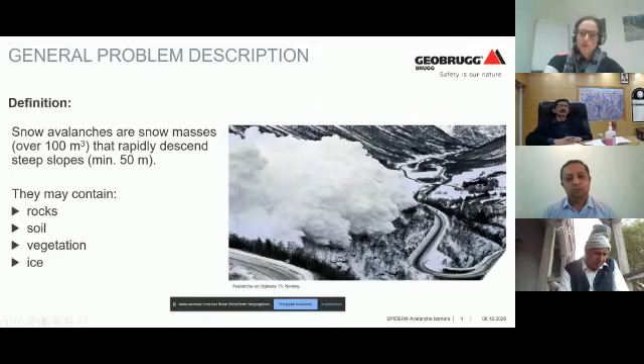So I'd like to start with some basics about avalanches. As we already heard, you need a lot of mass coming down a slope for an avalanche to occur, and that mass can contain rocks, soil, vegetation, or ice. For example, here is one at a highway infrastructure in Norway, and the goal is to prevent it or build structures so that this infrastructure is safe.

Important for construction, or depending on what kind of structure you'd like to build, is understanding the fracture zone, also called the starting zone. This is where the avalanche starts, and we usually have a slope angle of 30 to 50 degrees - at least 30 degrees is needed for it to start. Then we have the path, or transition zone, which can be a sheet or, as in that picture, a gully. Then we have the deposition or run-out zone where it halts, and this needs to be at a lesser slope angle, or as we already heard, it can have a run-up height if you meet a counter slope.

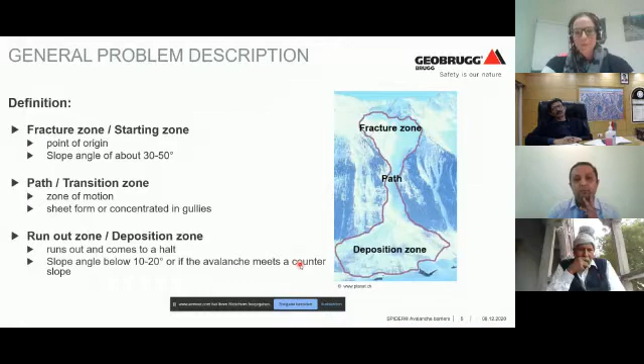So when talking about avalanches, we have to be aware of where they can occur. As I mentioned, we have the 30 to 50 degree range - we need at least 30 degrees for something to move or start. And why does an avalanche even move or start? What are the triggering effects?

First, we need precipitation - we have snow there - and most of the time wind is involved. We say that with precipitation and wind we are building the avalanche, because you get a lot of snow in one area. We need, within that snow cover, an unstable layer, which we call a weak layer. On top of that weak layer we have another layer of snow cover, and then the weak layer can release by itself due to the weight, or we have additional triggers - for example, skiers, or even explosives, animals, or just a rockfall hitting the snow cover.

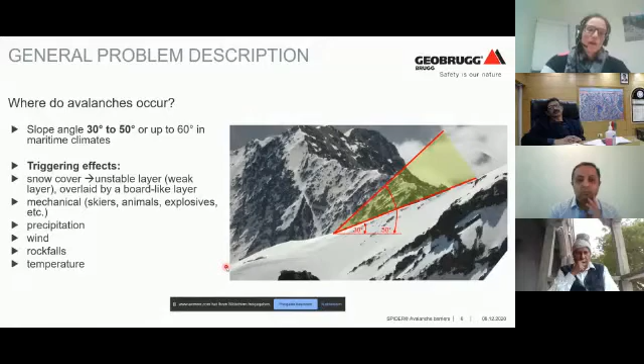Also a key factor for triggering effects is temperature. We see that in summer, or actually in springtime, when the snow gets really wet and heavy, avalanches trigger by themselves. Also important for understanding avalanches is classification - we have two types of release classifications.

We have the large slab, as you can see here - this is where we have that weak layer, and then it snowed again on top, so we have snow cover on top, and here skiers triggered the avalanche on that weak layer, causing the sheet to start moving. Or then we have loose snow, a punctual start of avalanches.

It's really important for simulating the flow, as we already heard, because it depends on the motion - what kind of avalanche we have. If we have one with a lot of air in it, that's a dry avalanche, or if we have, as in springtime when it's really warm, a dense, wet avalanche - the behavior of the motion is not the same.

There's also a huge difference depending on whether the avalanche starts on one of the weak layers, where we still have a lot of snow down to the ground, or if we have so-called ground avalanches that release right on the ground. At least in Switzerland, we see this a lot when it's warm and in spring - the entire snow cover starts to release, which is what we call wet avalanches.

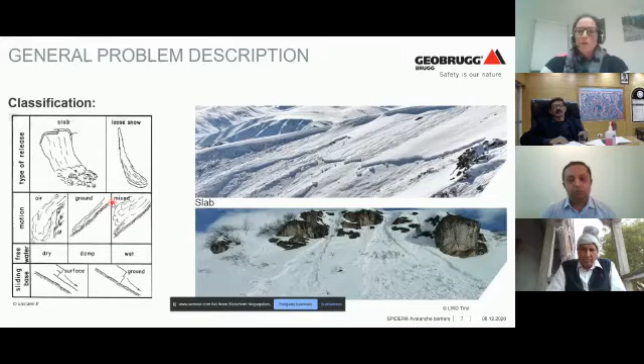And all of those are different kinds of avalanches, and for that we don't have one measure for mitigation. So it is important that we know what kind of process we are dealing with at a different site. Here I have a short overview of possibilities. So we have the starting and accumulation zone on top, then the tracking zone, transition zone, and down here the run out zone. In this case we have kind of everything here.

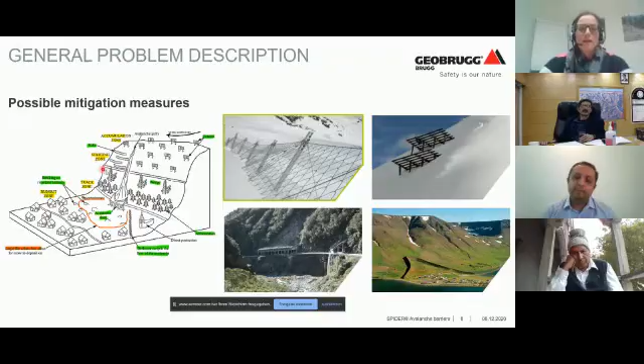Dr. Singh, can you continue with the questions please? Okay, a very general question, but I think it is very fruitful to understand these basic things related to the avalanche. So I am putting to all the panelists, not specific to anyone, what are the various factors that can trigger an avalanche?

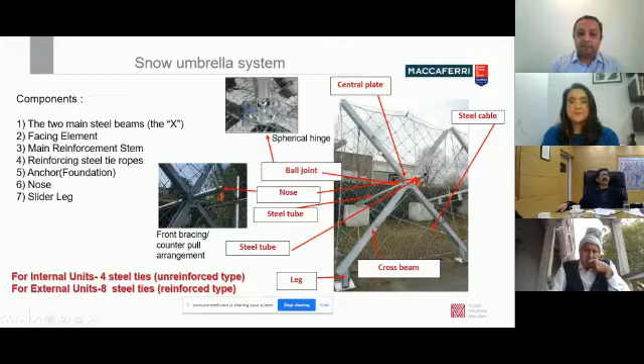So these are the units that we are using at all the 5 locations.

What will be the tensile strength of your wire? The wire ropes are basically graded at 1770 Newton per mm square. So these are of course the high strength wire ropes that are being used. Even the steel is high strength steel, which is heavily galvanized, and also suitable for low temperature conditions. Otherwise, if it's regular steel, it tends to become brittle with low temperatures.

Okay, can you have some creep type of study related to these wires? Some creep study has been conducted because there is continuous loading going on, if it is a continuous flow.

So these systems are tested on field. They are installed on the field, and they need to sustain at least one season for it to pass the test. So that has been done for these systems, and they have technical approval done in Italy.

As far as the creep with respect to the loading which is going to come, that gets accounted in the design itself, not just of the materials but also in the pressure calculation. When we do the design, there are different snow factors we have to take into account, like the glide factor, the creep factor, the altitude factor. So the creep factor is also inbuilt when we calculate the snow pressure on the system.

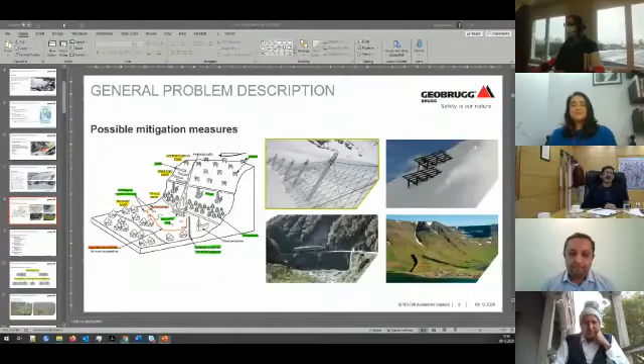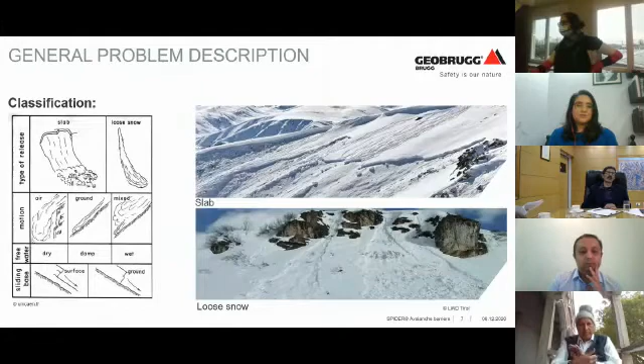Is there any possibility to go for the presentation once again, or still not? I think it's working now. Yes, we can. Welcome, thank you. Please continue. So you already see my screen? Yes, it is showing. Perfect. Was that the last slide you saw, or did you hear something? I think this is where we were.

Okay, perfect. So I went on with possible mitigation measures. As we said, we have the accumulation and starting zone on top, and there we can build in some possible mitigation measures, like snow nets or snow bridges. Then we have the tracks and the runout zone, and also if you have something on the track or transition zone, for example a road, we can have a tunnel, as you can also see on the right picture down here.

I don't have a pointer at the moment, but I think you can see it. Then we have some measures we can install in the runout zone, for example dams, or if you don't have that many houses there, you can resettle the houses already so that you have enough space and area for the runout zone. So there is a couple of possibilities for measures, and it depends on where your location is and what your process is and what you'd like to prevent.

So I summarized that here a bit. You have the technical measures, like all the measures in the starting zone, such as tunnels and deflection structures. You also have, for example if you have houses there, object protection measures for the houses. Then we have biological measures. At least here, where we have the forest boundary pretty high, we can use the forest to protect from the avalanche. As you can see here, we have a tunnel and a gallery, and still the trees. So we use them quite a lot, or at least as help if we have them. Maybe not so much for India.

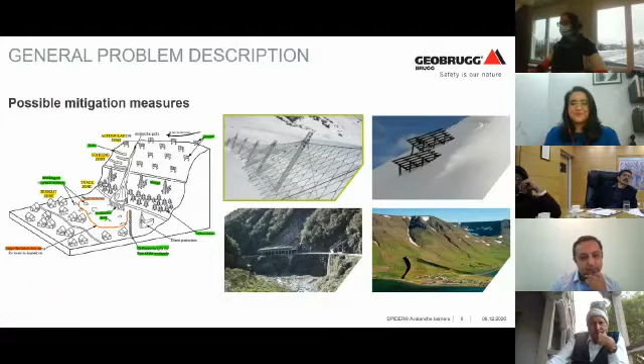Then we also have other systems, for example warning systems, or you can artificially trigger them. In that case we have mobile explosive stations, or you can try to explode them from the bottom valley or by helicopter. And of course, then you have to evacuate and close roads. What is not really working in Switzerland, for example, is spatial planning measures, where you really resettle people. So in our case that is not really working. We only have restrictions at the moment, where you're not allowed to build houses anymore where it is dangerous.

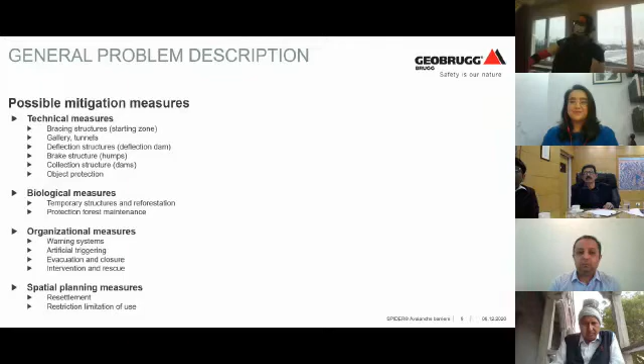So that is a rough overview of possibilities you can use in case of avalanche problems, just general ones if you want to go for technical measures. You need to take into account a lot of different things, and it's not only that you can install technical measures, it's kind of a combination, for example technical measures together with a warning system.

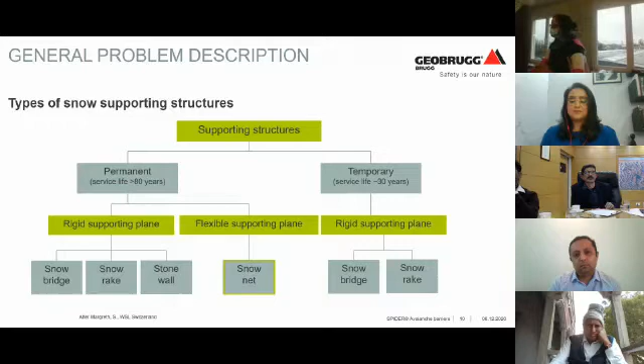And then, as I said, supporting structures in the starting zone. That is really important to know: they are only for the starting zone, so you install them there. We have the snow bridge, which is a rigid supporting structure, and we have these flexible supporting structures, the snow net.

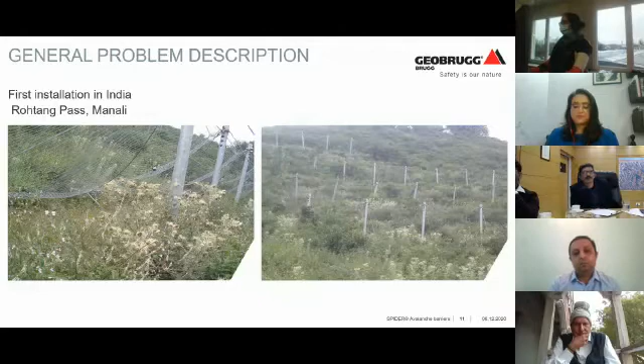For example, here we already had one in India, so that is a flexible one. It's a snow net, as you can see. Basically we have the net, we have posts, and we have ropes and anchors. This started a long time ago. They first installed them even with wood together in combination, and now it has developed up to what's called spider avalanche systems, the one you can see on the right-hand side.

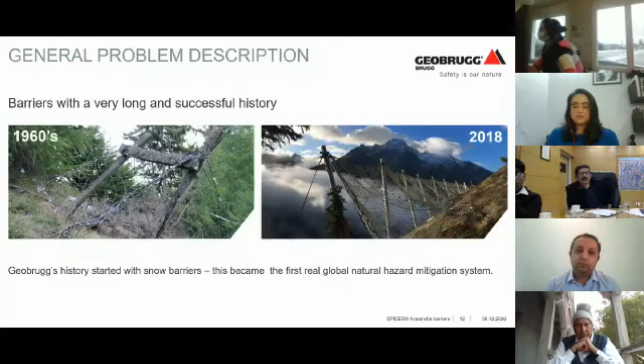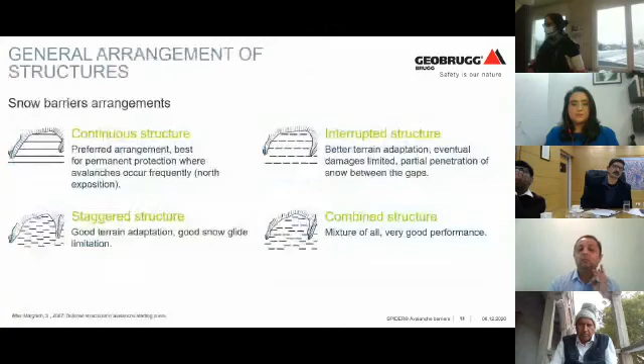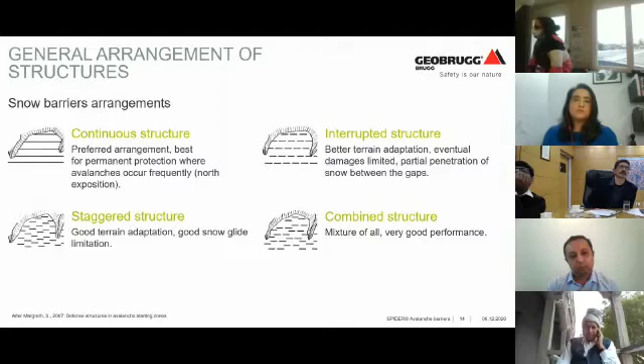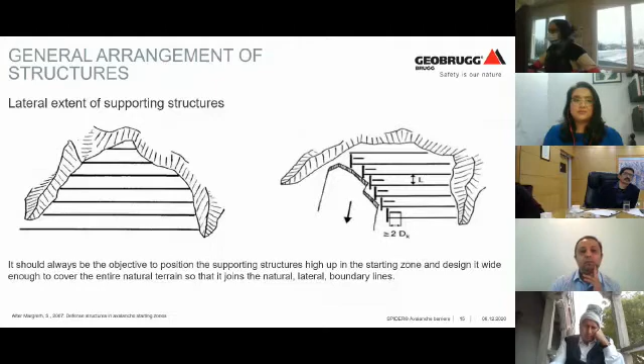Important is, if you like to install something like that, there is an arrangement of the barriers. You can have continuous structures, basically a closed line, or you can have interrupted structures, and it really depends on the terrain and what is occurring there. You can also have combined structures, as you can see here, with some long lines and then shorter ones in between. All of that defines how you should arrange them and what the gaps in between should be. If the gaps between the structures are too large, you should be aware that something could start again. All of this is defined in the guideline for defense structures in avalanche starting zones from Switzerland, and that is basically applied worldwide. All the constructions here in Switzerland are built according to that guideline.

Here is a top view of a good example. You can see that we have these different lines and gaps in between.

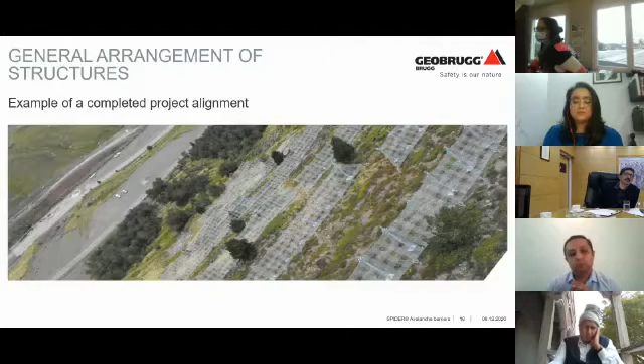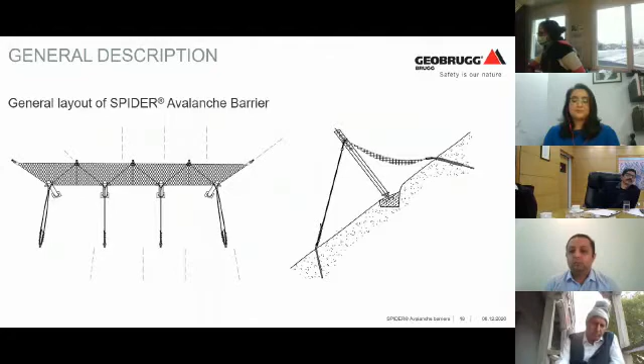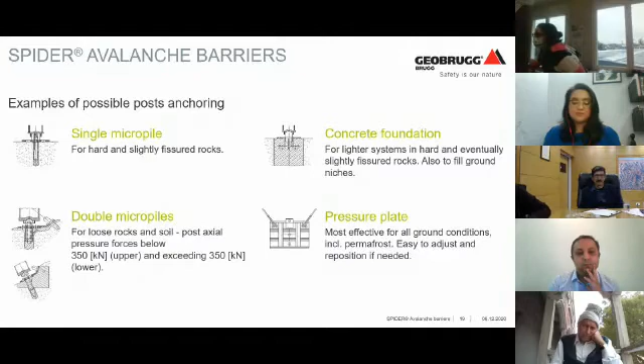So for how it looks with a net solution, as I mentioned, we have the post, a net, and ropes and anchors. Basically it's pretty simple and fast for installation. These are possibilities for anchoring the post, and there is something like the pressure post plate, which you can put on loose soil without having to directly anchor it with a micro pile like the ones on the left side. This pressure plate is also good because if you have creeping soil, it creeps with you, so it creeps with the system.

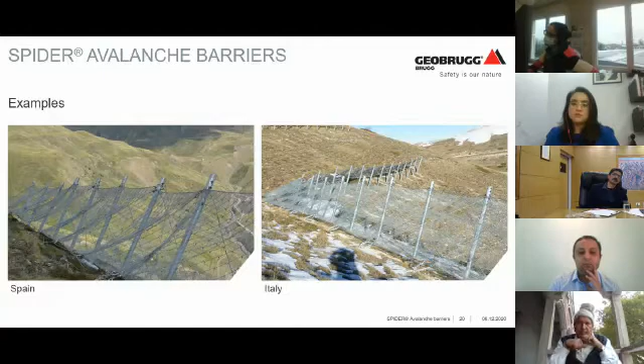And here again, some examples from Spain and Italy. So they get installed everywhere we have avalanches.

As I already mentioned, we have that Swiss guideline, so in Switzerland you can't install something that is not according to that guideline. The guideline basically tells you what kind of static proofs and calculation proofs you need for your system. And then, as already mentioned with the umbrella system, it also has to be installed in the field for one year or even more, and then they decide whether to approve the system for certification. Only when it's certified can you install it here.

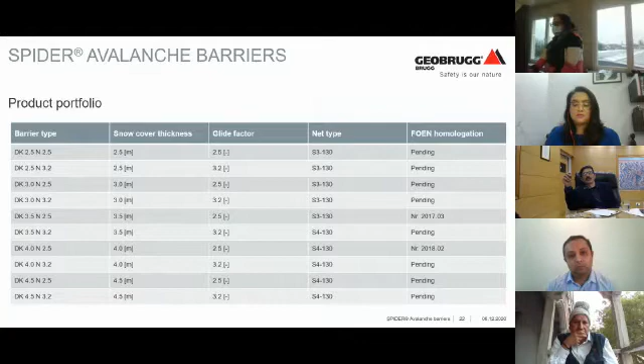So this is just a rough overview of what kind of systems we have, and the systems are mostly categorized by snow cover thickness. That is a key factor, and as already heard, the gliding factor too.

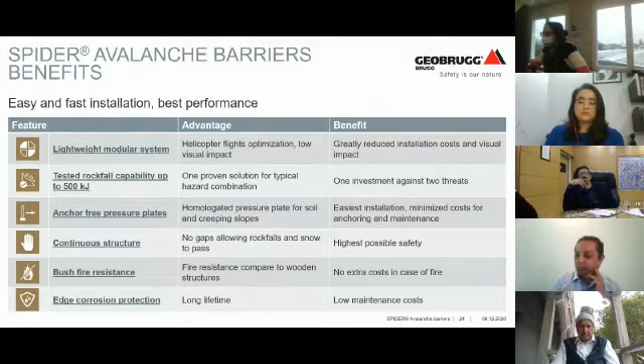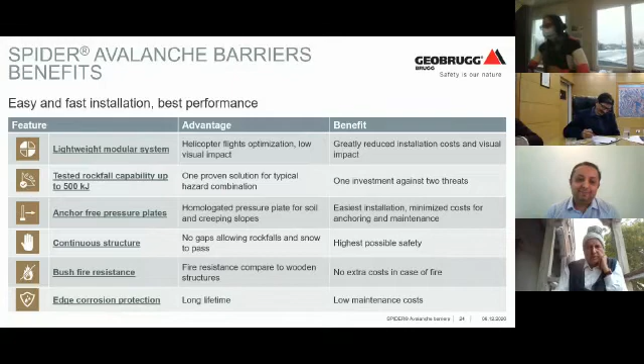Just briefly, what are the benefits of such an installation? It's pretty light, you can fly it up by helicopter, and in that case it's also tested against rockfall. That is a big difference compared to the rigid system: if you have a rockfall, rigid systems don't deal well with it because they are so fixed, whereas a net or flexible system can handle rockfalls better. Then, as I said, we have the pressure plates that help a lot with installation. You don't have bushfires I guess, but it's also good with fires, and of course there's corrosion protection.

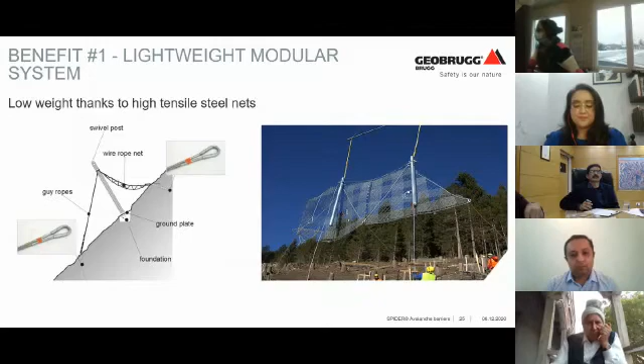This is a picture showing how it looks. You can build everything on a smooth place together, and then hang it up on the helicopter and fly it onto the site. You can also do a combination, so we have the rigid ones and the flexible ones in between, just depending on the situation.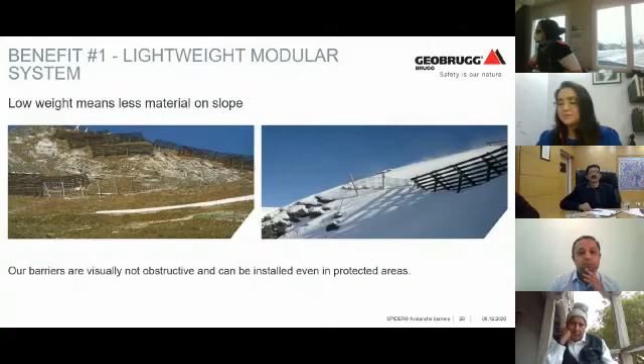As I mentioned, rockfall is always a problem. So if you have more than one row, it's also possible that one row gets hit by rock so much that it's not useful anymore, but it gets stopped in the second or third row.

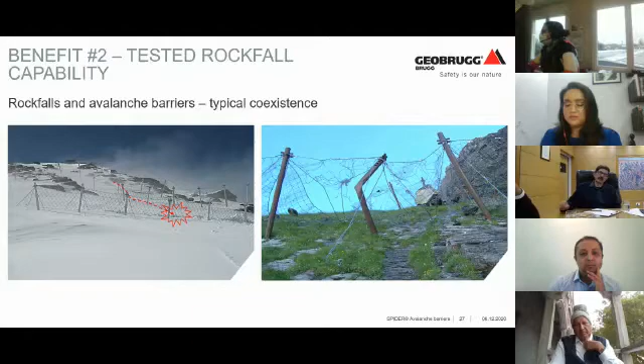Regarding rockfall, it's always a question of what is the major hazard you want to prevent. In case of avalanches, that's obviously the major hazard, and if there could be a bit of rockfall too, you could install one, but it's not the major hazard. If you want to withstand rockfall, you should better go for a rockfall barrier.

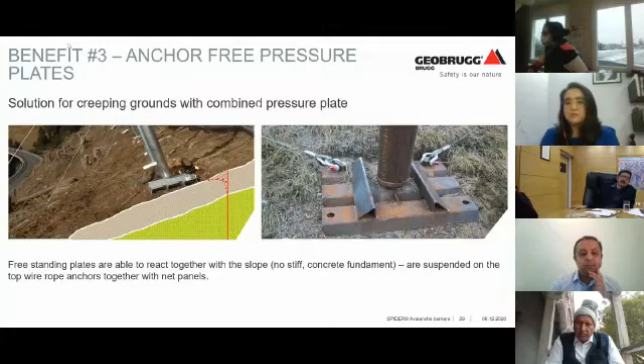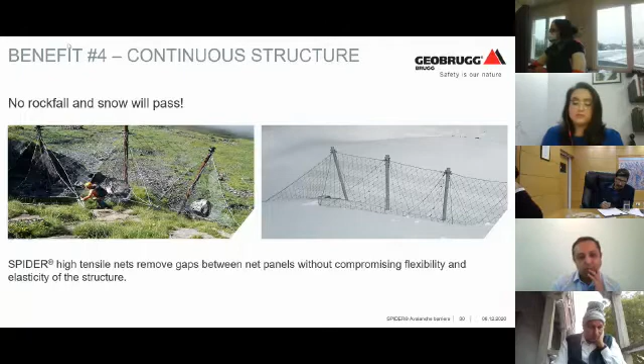There is not only the static component, there's also the dynamic part. If you just have static loading because of snowfall, there's also that creeping factor, the creeping motion of wet snow in springtime. A barrier is designed either for static or dynamic loading, so getting the right combination is pretty difficult, but we've managed it well over these last 40 years.

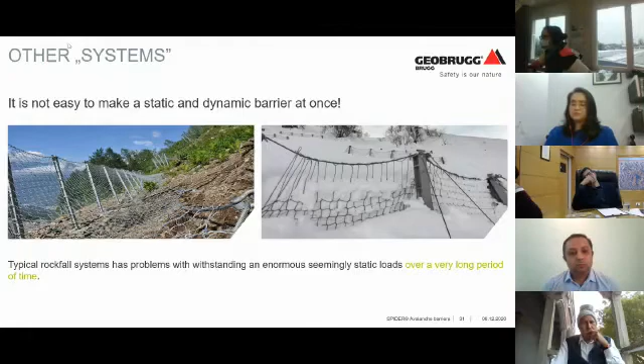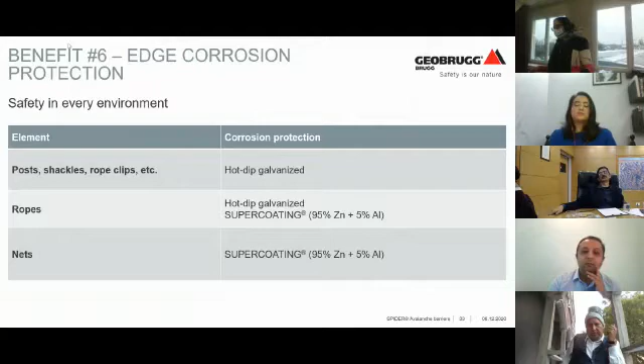Also, fire shouldn't be a problem since it's steel. Regarding corrosion, that topic is not as important as for other products, because you're high up, so your corrosion level isn't so high. Even here in Switzerland, there's no specific corrosion protection needed for avalanche structures. The guideline tells us you should have an allowance of a larger diameter so it can get corroded a bit, but it's not like for other products - as long as you're not close to the sea, like in Norway, where you're really close to the sea with avalanches. There you should keep an eye on corrosion.

I'll skip a bit on the corrosion part, and we'll show you some examples. They've been there since the 1980s, so that's 40 years now, and they're still looking quite well, almost as new.

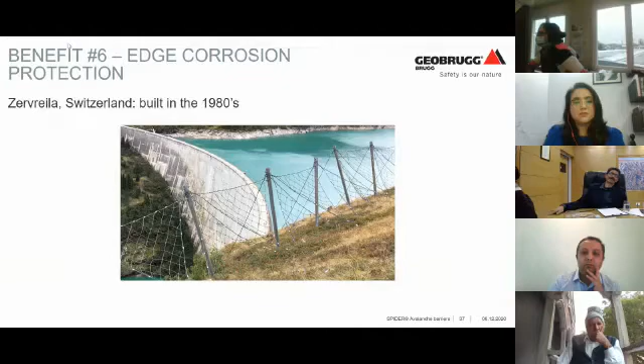So just to give you an impression of how they look - they have different heights, barrier types, so that's 3 meters here. And then we have different gliding factors. Basically the guideline tells us we can go for 2.5 or 3.2, depending on how your terrain looks. They're certified for those standard parameters the guideline gives us.

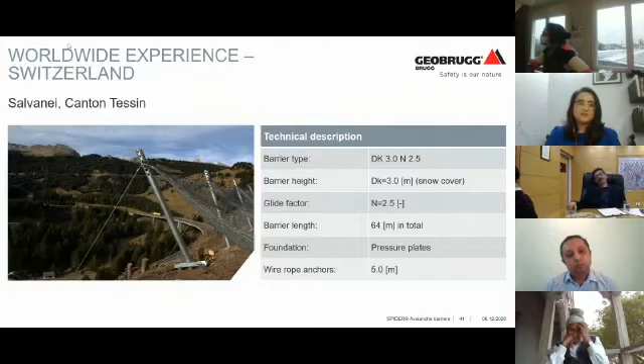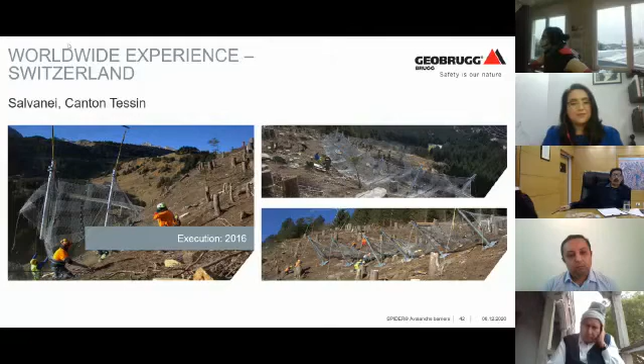Here we have a total line of 64 meters, and here you can see how the installation is going, from the top view.

Another one - this one is already quite long. Actually it's not just one, it's the total one - every single field together sums up to 455 meters.

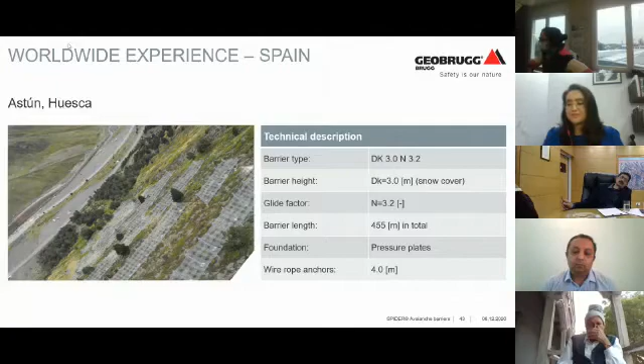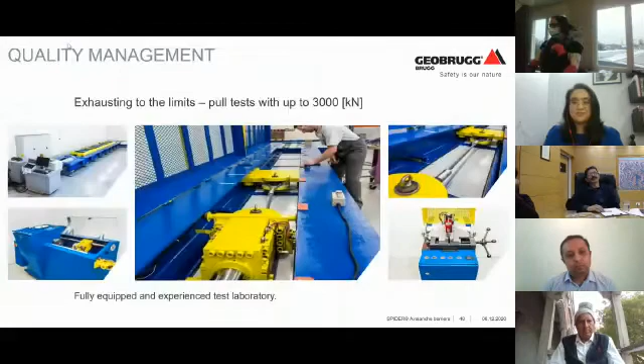That's just the overall scope. You get everything here, and I guess we'll talk a bit more about the avalanche systems during the question and answer. Perfect, I think we can continue with the questions now, and take this discussion forward.

Professor Singh, would you like to take over? Yes. Two quick questions, ma'am, and we'd like short answers because we have the next session also.

So, what are the risk assessment techniques to propose an avalanche protection system on a particular site? Okay, what we are doing is called integral risk management. Basically it consists of risk analysis, risk assessment, and then action planning. In the risk analysis, you ask yourself, at the site, what could happen - for example, is there avalanche risk, is there rockfall, or whatever.

At the risk assessment stage, it's the question of what is likely to happen, and there it's already about what is underneath - is it houses, is it people's life, is it traffic? Then you have the third stage where you do your action planning - what must be done for that case, or what your extreme scenarios are, what you'd like to protect.

Let me share a couple of slides to show a few things. I hope you are able to see my screen. Yes, please. Okay, thank you. So as I was mentioning, first and foremost is the slope inclination that we have to see, and accordingly place the supporting system in that zone. The next thing we have to decide is what should be the first starting line, the topmost line in this section that we have to fix.

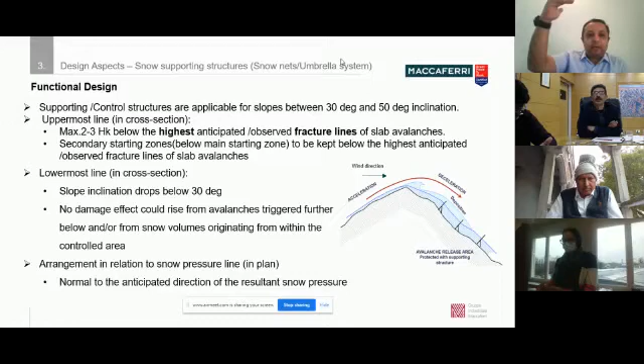So typically, this is fixed at a distance of around 2 to 3 times the height of snow deposition. So 2 to 3 times the height of deposition of snow from the observed or anticipated fracture line of an avalanche. That is the first line. That's how we have to fix it.

If there are certain zones along the slope, if the slope is very long, there are also secondary starting zones. We have to take that into consideration and fix the topmost line for that zone accordingly. With respect to the lowermost lines, the lowermost line should be fixed in such a way that the slope inclination below it drops to less than 30 degrees, so that the avalanche doesn't happen, and there should not be any damage which can arise from an avalanche triggered in that zone. That's how we fix the bottommost or lowermost line.

So once we have the uppermost and lowermost line, we now have to also fix the intermediate lines and what should be the spacing and things like that.

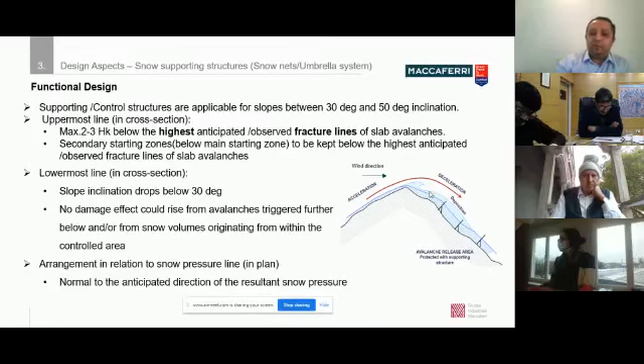With respect to the alignment in relation to the snow pressure line, the alignment of these structures along the length should be normal to the anticipated direction of the snow pressure. We have to follow the contours in the plan drawing, so that the anticipated pressure direction remains normal. As far as the lateral extent is concerned, how long should these lines be?

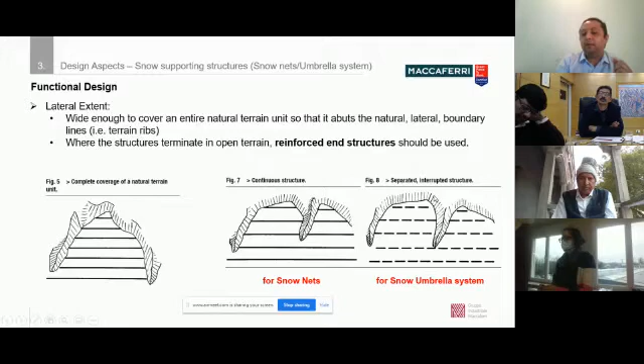The lateral extent should be wide enough to cover the entire natural terrain, so that ideally, if there are certain terrain ribs or boundaries existing, it should be extended up to that. In case they need to be terminated in open terrain, naturally the end part needs to be reinforced. This kind of arrangement is the same whether it is a snow net or an umbrella system. It's just that with the umbrella system there will be 0.5 meter gaps between the individual units, so it's called the separated or interrupted structure.

When we come to the spacing between the rows, the Swiss guideline also incorporates the procedure to fix it, and they have given some equations, and they've also given tables for the most likely conditions that we encounter during the design. So the design of the spacing is dependent on the inclination of the slope first and foremost, and the height of the snow deposition. It is also dependent on...

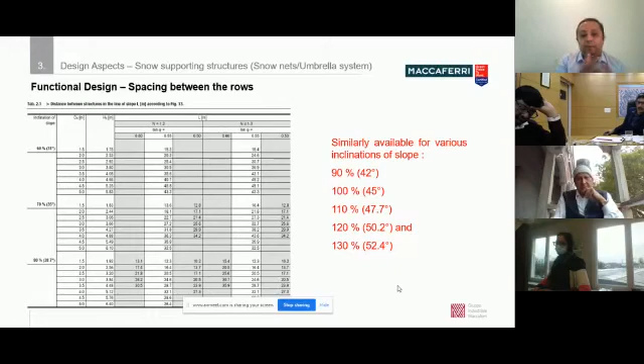the glide factor. This n value, the glide factor, is dependent again on the roughness of the terrain and the configuration of the slope. Apart from that, there is also a dependency on the roughness between the snow and the terrain. There are different ranges given, and we have tables available for different slope inclinations. We can use these tables, or use the equation from which these tables are formulated, and do some interpolation if required, if there is a variation. So this is how we do the functional design.

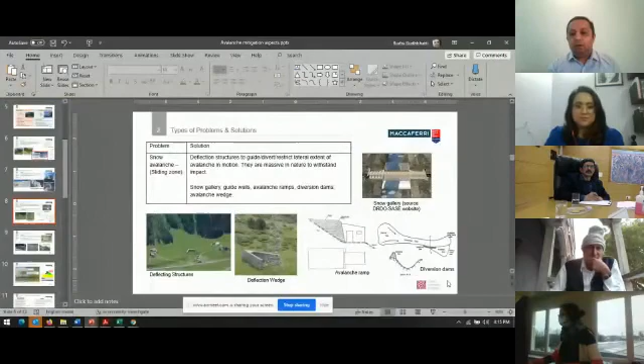I'll quickly show it again so I can be brief in explaining, using the already available slide. So when it comes to the sliding zone, which is the intermediate zone, the deflection structures work there, and the purpose of such deflection structures is basically to guide, divert, or restrict the lateral extent of the avalanche, which is already in motion, because in the formation zone the avalanche has already started. So in the intermediate or sliding zone, everything is moving, so these structures need to be very massive in nature to withstand such a moving impact.

Some of the structures, like the snow gallery which Dr. Kumar was mentioning, are a good solution that can be adopted in the sliding zone. Other options are guide walls or avalanche ramps, which basically allow the full avalanche to move out and away from the infrastructure being protected, so it acts kind of like a roof. There are also diversion dams to restrict the lateral extent. If there are transmission towers, we can have a masonry wall forming a wedge so that the avalanche can be deflected.

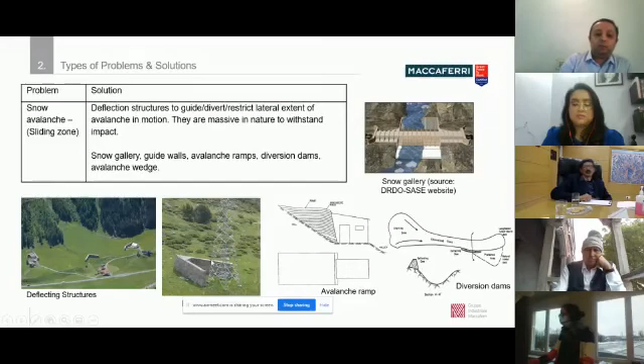When we come to the runout zone, which is the bottommost zone, the braking structures play the main role there. Since they need to brake the movement of the flow, these need to be very massive in construction to basically restrain the avalanche mass. So the structures here could be in the form of masonry catch dams, retaining walls, or wedges and mounds.

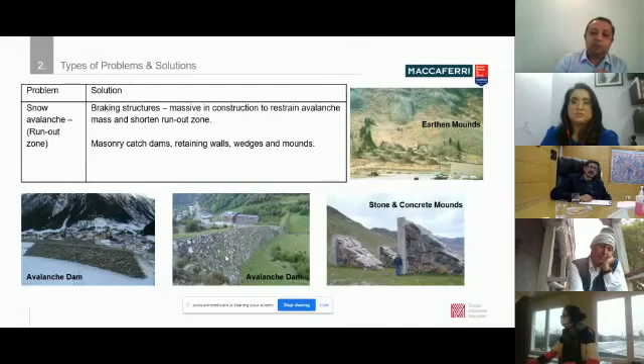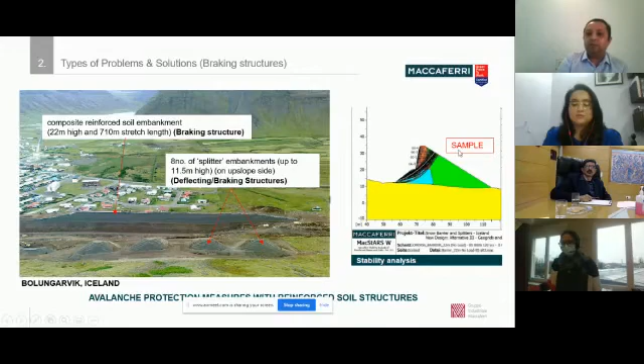The retaining walls can also be in the form of reinforced soil structures, wherein we need a very high structure with limited space availability and a relatively vertical face, because this vertical face actually helps in stopping the avalanche from moving further. If it's a sloping face and the avalanche comes from this side, it will try to run over it. But if the avalanche comes from the vertical face side, it will not easily allow it to overtop it. So such retention structures can be used.

When it comes to the design of the formation zone, I already explained that we do the functional design based on the Swiss guideline, but for the structural design, we have an internal software based on a 3D finite element model.

I think Professor Singh dropped out because of internet issues. I will just wait for him to join back. Until then, we can continue the conversation.

Nadine, I'm going to direct this question to you. Although you already spoke about corrosion protection when you were presenting, how important is corrosion protection for various components of the protection systems, and how do you ensure a longer life of these components?

As I already mentioned, according to the Swiss guideline, corrosion is not really that important. It is written that for the superstructure, there is no need for an additional corrosion resistance, and that is just for the superstructure. But everything closer to the ground should be more aware of corrosion possibility, and there we have a rust allowance of 2 millimeters at least, so you can always go a bit higher to be on the safe side. Since corrosion is due to the corrosivity level, and in the mountains that is not as high as close to the seaside, if you're close to the seaside you should take that into account. But in general, there is no special need for corrosion protection.